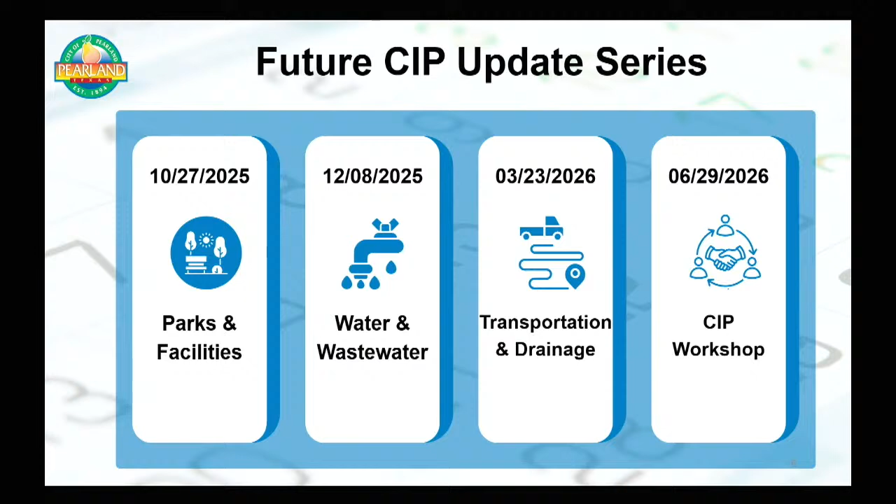At this time, I'll pass the presentation over to Ms. Erica Weekly for updates on the budget impacts. Good afternoon, Mayor and Council.

I'll review the key milestones and budgetary implications related to the fiscal year 26 Capital Improvement Plan. Earlier this year, on September 8th, City Council approved the fiscal year 26 Capital Improvement Plan. This approval outlines the planned infrastructure investments and major projects for the upcoming fiscal year.

Then on October 13th, Council approved the intent to reimburse for fiscal year 26. This step allows us to begin spending on approved projects up to the listed amounts, even before the actual debt is issued. It's important to note that while this authorization lets projects move forward, Council still needs to approve the awards for each individual project as they come up.

Looking ahead to May 2026, we expect to complete the fiscal year debt sale. The timing of this sale is significant because any debt issued in fiscal year 26 will affect the fiscal year 27 debt rate. Similarly, if we make changes to the fiscal year 27 Capital Improvement Plan, those adjustments will influence the fiscal year 28 debt rate.

Finally, it's important to remember that operations and maintenance costs are built into each CIP project. These costs are included in the budget during the year the project becomes operational. We also incorporate these ongoing expenses into our multi-year budget forecast and rate model to ensure long-term financial stability.

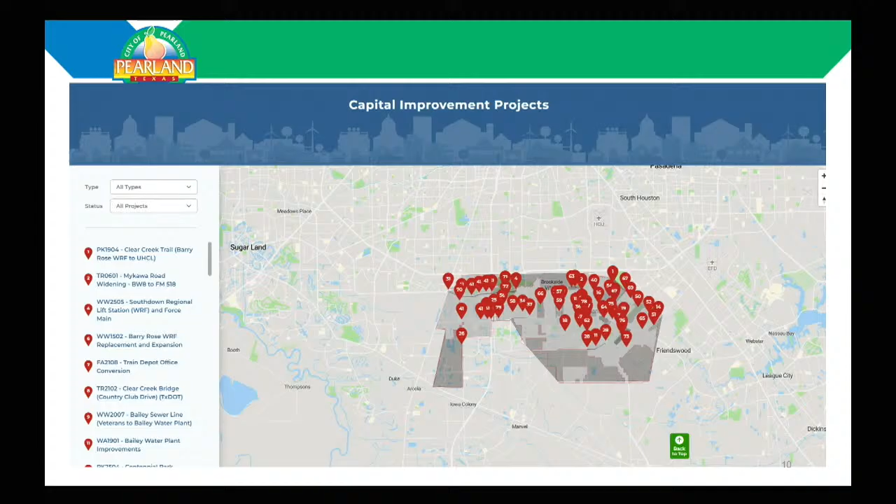We have a lot of projects to cover today, as I mentioned, and we will start on the water projects. On the next slides, we'll look at the water projects that have been completed, are under design or construction, the ones starting in fiscal year 26, as well as anticipated future projects.

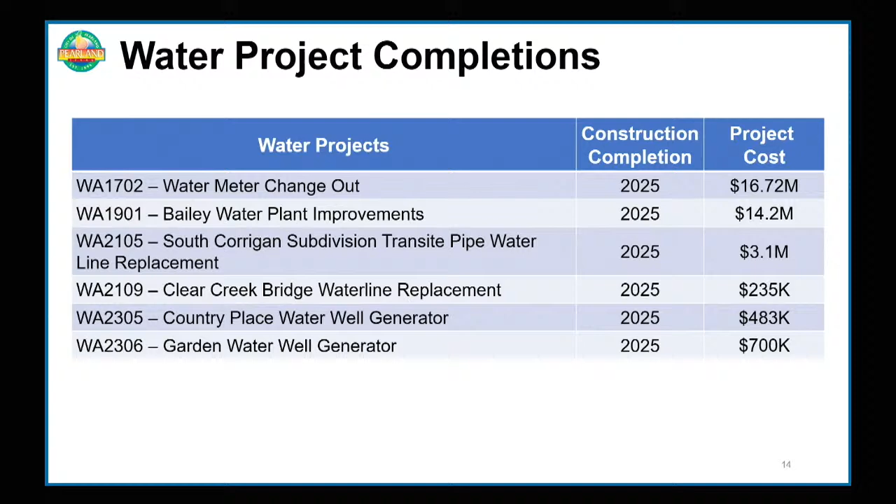Out of the completed projects, I would like to highlight the Bailey Water Plant improvements. This project aimed to address iron and manganese, which occur naturally in groundwater, but neither element causes health effects at concentrations found in Pearland. They sometimes have a rusty visual impact on water quality, so to efficiently remove the iron and manganese, the city installed aerator removal systems.

Although this project experienced some delayed challenges, we completed it approximately $268,000 under budget, and the facility has been providing quality water to the east side of Pearland. Since its commissioning in early 2025, the water quality throughout the Bailey Road and Veterans Drive corridor has vastly improved. This improvement has resulted in decreased water system maintenance to ensure optimal water quality.

The water lines replacement project at South Corrigan neighborhood replaced approximately 3.5 miles of transite water lines with PVC. Transite pipe water line has a failure rate significantly higher than PVC pipes and is also responsible for a higher percentage of work orders per foot and requires greater resources to maintain relative to PVC. This project experienced some delays but was still completed within budget.

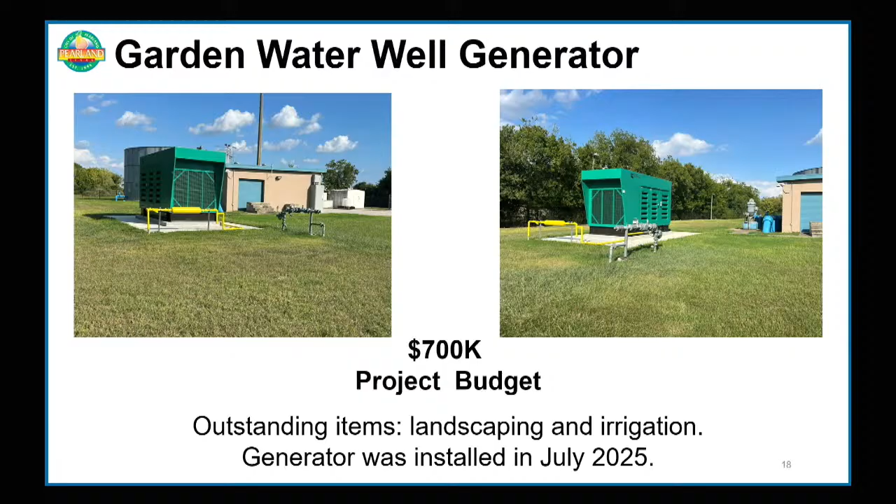Creekview and Shady Crest Transite Pipe Waterline Replacement has been combined with the drainage portion funded by the 2023 bond program, and the wastewater portion, which we will also mention later. The southwest quadrant of Old Town Transite Waterline Replacement also included the drainage portion funded by the 2023 GO bond.

Here are some of the projects I would like to highlight that are currently under design. The FM 518 utility relocations, Phase 1 together with Phase 2, are currently at 90% design phase, and once completed, construction will be handled by TxDOT. This portion, also known as the West Segment, has a construction plan date to start in the fall of 2028.

Southwest quadrant of Old Town Transite Waterline Replacement, as mentioned, also included a drainage portion. This specific project includes replacement of approximately 2 miles of water lines. The project has completed the design portion and will move to the bidding phase, with estimated start of construction in the second quarter of 2026.

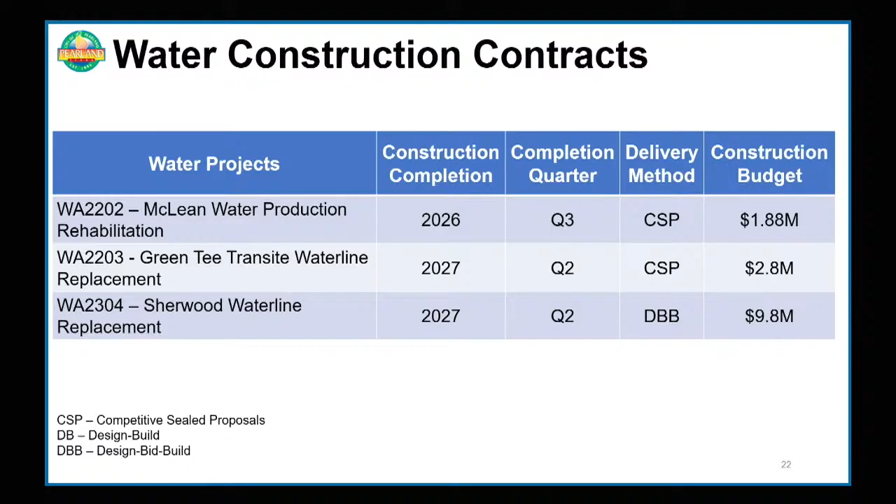McLean Water Production Facility is currently in construction and expected to be completed by fall of 2026. This project was enlisted due to numerous water line failures that the Public Works Department has experienced over the past several years. Most of the water line infrastructure at the production facilities is original to the facilities and has not been replaced since inception. The main goal of this project is the reduction of service interruptions.

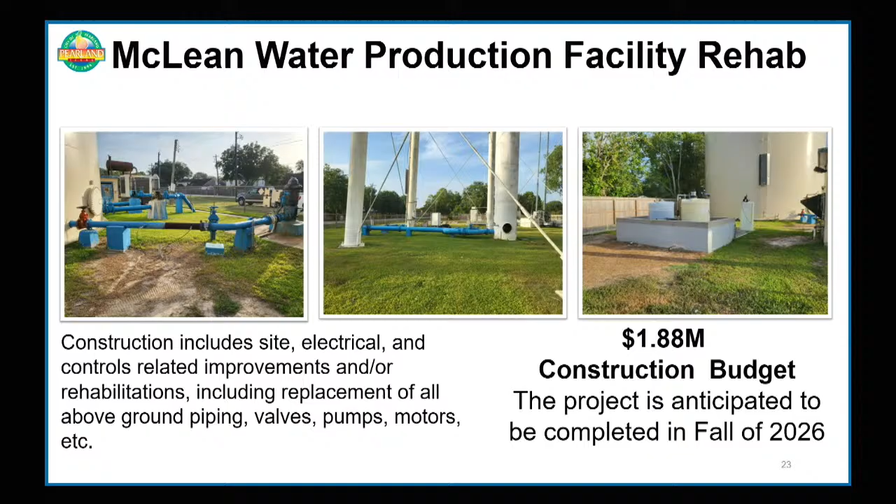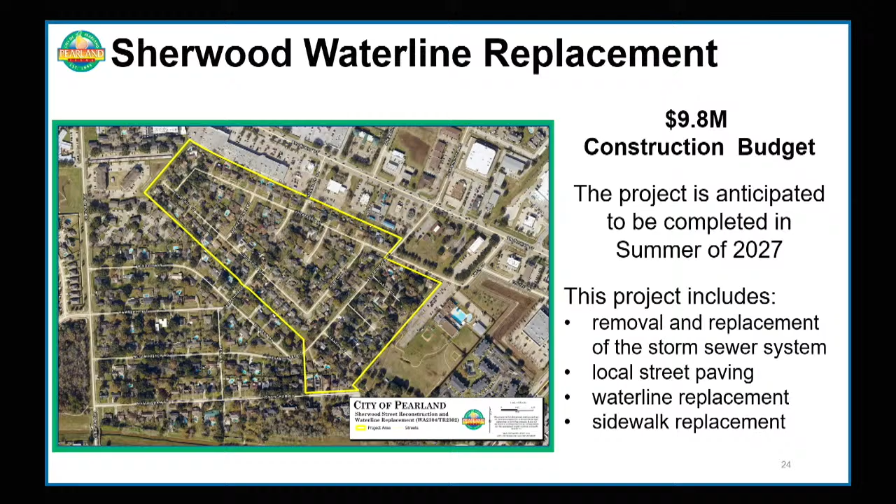The 2018 assessment report identified each plant site and ranked McLean as a priority to address internal lines, correct pump size for distribution, among other asset rehabilitation and replacement. This project was awarded by council in October and is expected to start construction either this month or January of next year, and expected to be completed by summer of 2027. The project includes drainage, water, streets, and sidewalk improvements.

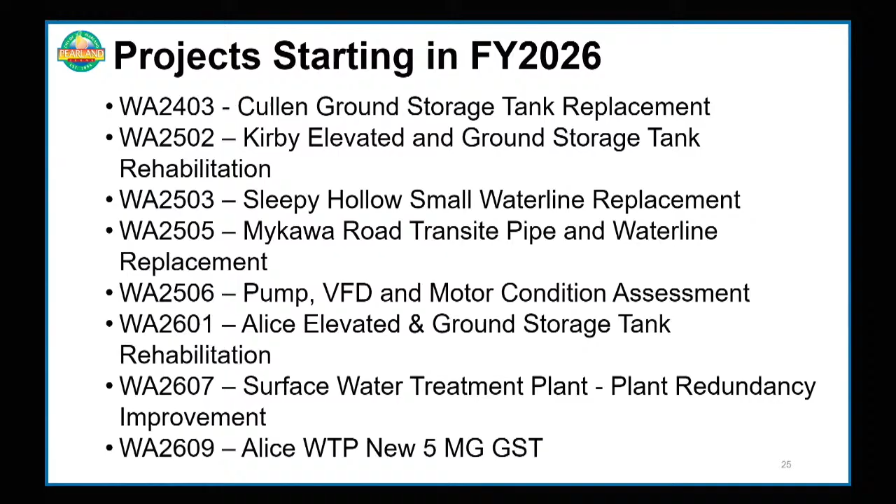The Alice Elevated and Ground Storage Tank Rehabilitation Project includes the assessment of the ground storage tank, which has a 5 million gallon storage capacity, and the elevated storage tank, which has a 500,000 gallon storage capacity. Both are being planned for rehabilitation after recommendations from the assessments.

Since there is another project planned in the same location, we decided to combine this project with the Alice Water Treatment Plant's new 5 million gallon ground storage tank. This decision will allow better resource allocation, coordination with Pearland Water, and savings to the city.

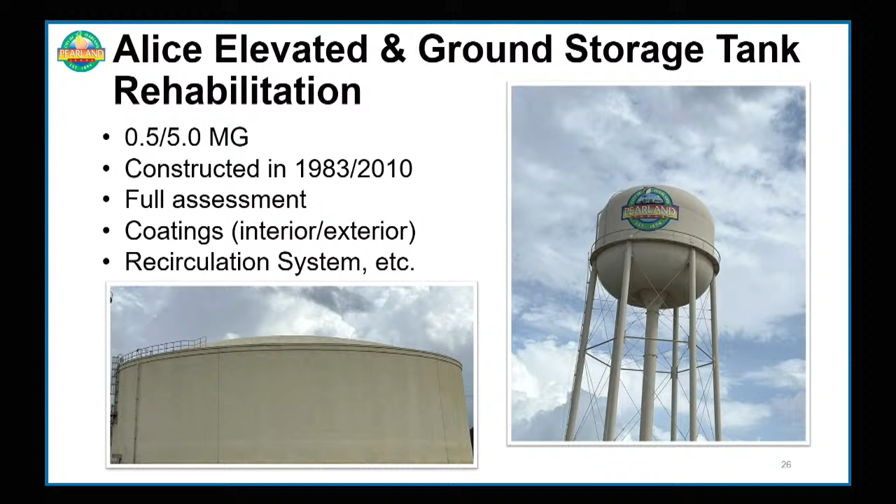These are the anticipated future projects, and they have not started design, study, or a schedule for future fiscal years. Here are the anticipated future water projects. They have not yet been funded, but are listed in the CIP for the purposes of financial planning, laying out what is needed, location, and timing for over the next 5 years.

Projects such as Lakes of Edgewater Estates Water Quality Program, Liberty Drive and John Lizer Transite Water Pipe Line Replacement, Towne Lakes Water Quality Program, and Alexander Landing line replacement have been recommended by the City's Water Master Plan due to failing transite water lines that are being replaced with PVC piping.

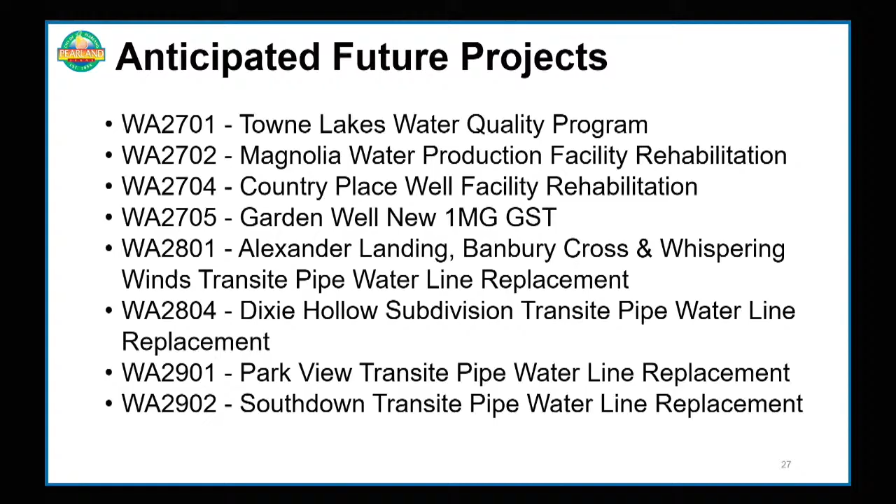And here are additional anticipated future projects.

Out of the future projects, I would like to highlight the Lakes of Edgewater Estates Water Quality Program. This project is part of the city's multi-year improvement program to improve water quality by replacing aging water lines, increasing pipe diameter, and connecting dead-end lines. This project is planned to start design in fiscal year 30.

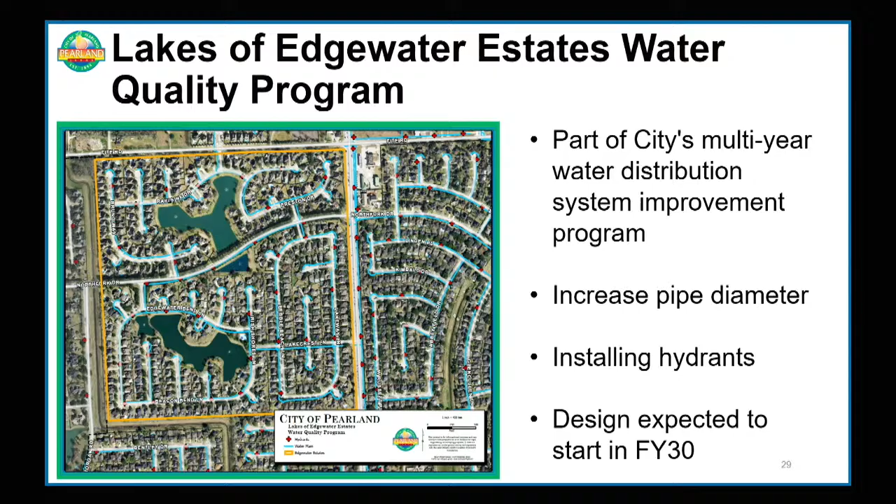This is another project that is being planned for the future, which is estimated to have design start in fiscal year 29, and it has not yet been funded.

The Liberty Drive John Lizer Transite Pipe Water Line Replacement is part of the city's commitment to replace existing transite pipe water lines. This project will replace approximately 1.5 miles of transite water line infrastructure in the John Lizer and Liberty Drive areas. The service lines will also be replaced.

Council, this concludes the CIP water updates. I will now turn the presentation to Mr. Julian Kelly, Assistant Director of Utilities.

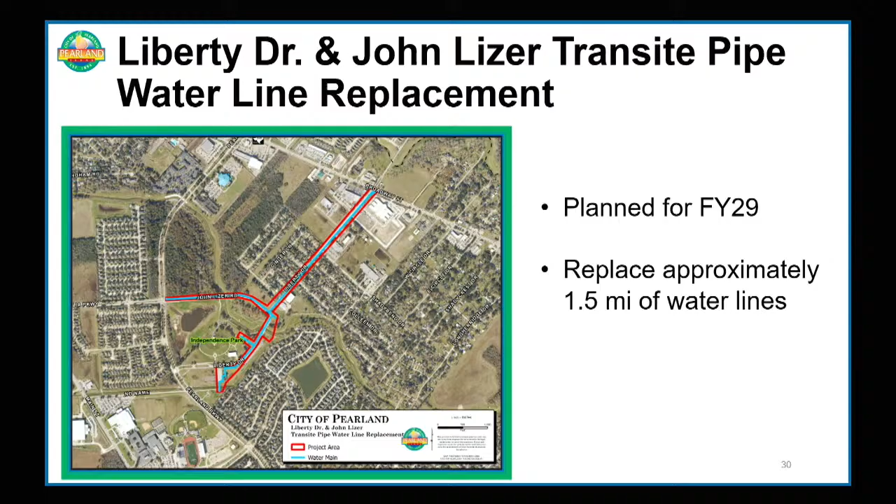Good evening, Mayor, council members, and listening audience. Thank you for this opportunity to speak with you this evening. As the Assistant Director of Utilities, it is my privilege to introduce to you the operations and maintenance update for our Pearland Water Division Department.

Tonight, you'll hear directly from our management team, who will provide you with an overview of the essential functions and how Pearland Water Systems operate safely and effectively. As a quick reminder, our division has many different supporting staff and divisions together, but we have 3 core divisions that are part of our department.

Water production, which ensures the safe and reliable drinking water supply that meets and exceeds regulatory standards set by the EPA and TCEQ. There's distribution and collections, which is responsible for delivering high quality water to our customers and efficiently managing the return of that wastewater to the treatment plants. And wastewater treatment, which handles the processing of domestic wastewater to protect our public health and ensure environmental safety and discharge.

These functions all wrapped together are fundamental to our community's daily life and are a key focus of our capital improvement plan. The updates you'll hear today reflect the dedication of our staff and those that help us on a daily basis. Thank you, and at this time, we'll turn it over to Nicholas, the Supervisor of Water Production.

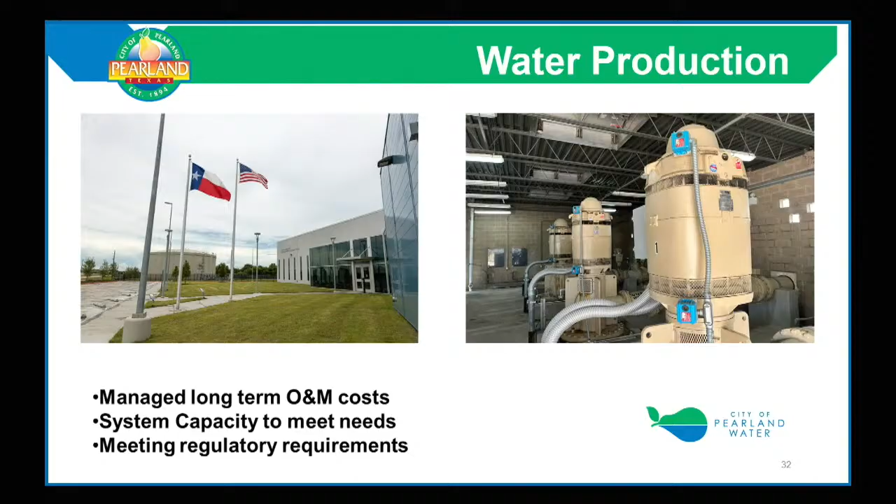Our team depends on a variety of critical assets to ensure production, treatment, storage, and distribution of safe drinking water to the city's water system. Pearland Water maintains these assets through annual operational budgets and strategic CIP projects.

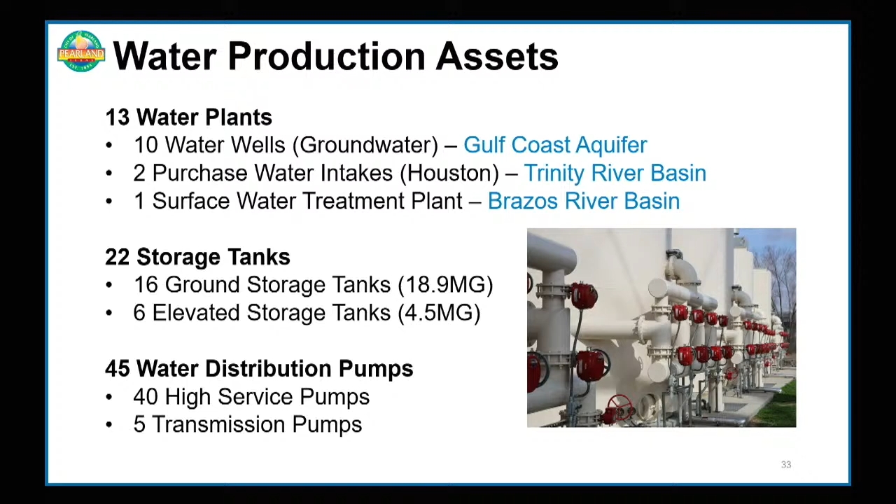Since the integration of the city's surface water treatment plant, Pearland Water is aiming to operationally reduce our annual budgetary requirements for our purchased water reliance. These sources will continue to be available when needed to meet our water system demands in higher volume conditions. Our team will elaborate further on this later in the presentation.

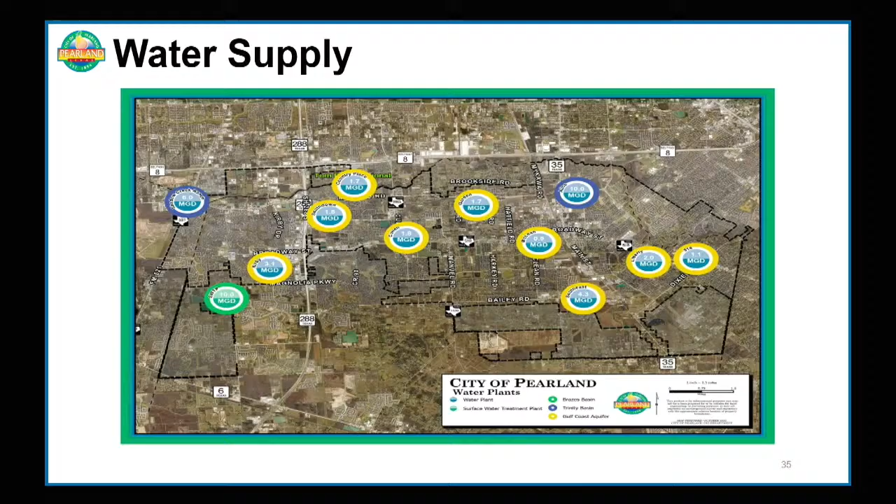The city's diverse water supply provides the necessary production capabilities to continuously meet the water system's demand through all seasons, presented along the Gulf Coast region. Our current water supply capacity is 40% from the Gulf Coast Aquifer, 37% from the Trinity River Basin, and 23% from the Brazos River Basin.

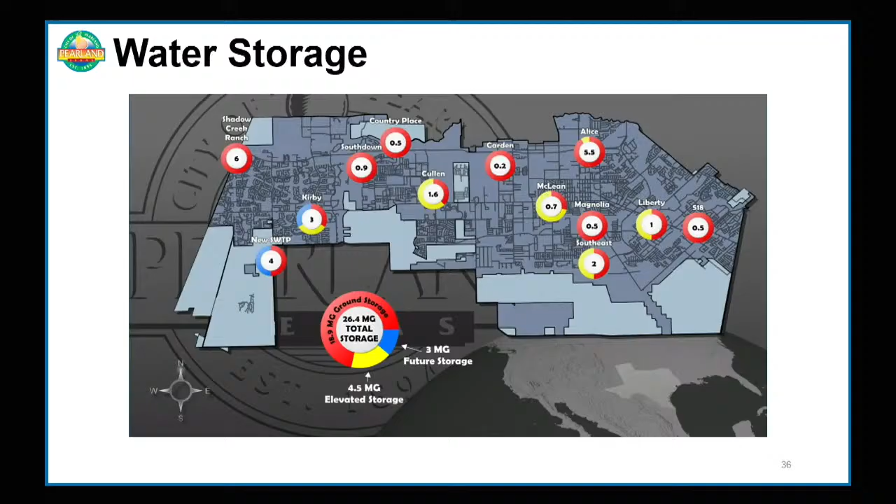With Pearland Water's combination of ground and elevated storage tanks, these storage tank supplies are replenished as the water system withdraws by consumption demand. Water storage tanks not only house the city's drinking water supply before being pumped for consumption, but they are also the most visible utility assets to the public.

Pearland Water's continued investments into providing safe drinking water to the city's customers requires a multitude of functions to ensure these critical services. The Pearland Water and Capital Projects teams are currently updating our water master plan that will provide operational and developmental practices to ensure our commitment to our community is continuously met. Now I'd like to introduce our surface water treatment plant manager, Sean Gilmore.

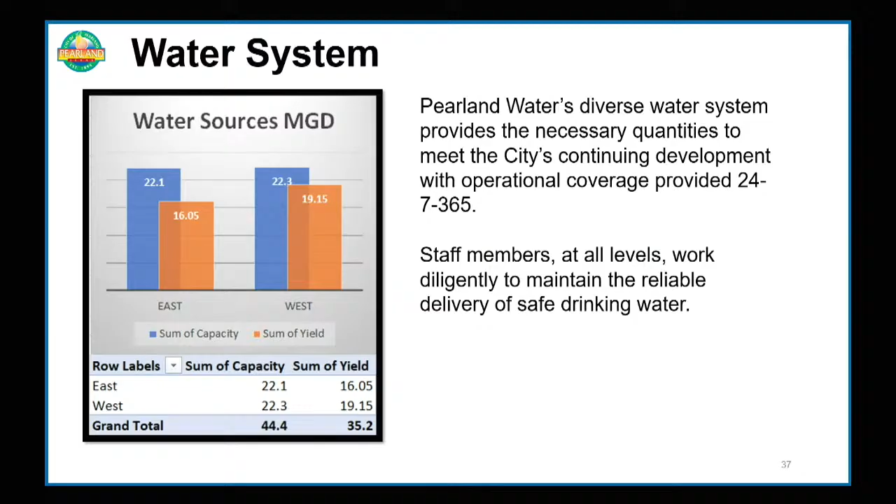Thank you, Nick. Thank you, Mayor and Council, for this opportunity to highlight the benefits of the largest water investment the city has completed to date.

After 1 year of operation, the surface water treatment plant has accounted for 62% of all water consumption west of Cullen, herein referred to as the West End. This has led to a 68% reduction in well water pumpage and a 23% reduction in purchased water usage for the West End, particularly through the Shadow Creek water plant.

While the average consumption for this area has increased 24%, the plant supplied an average of 5 million gallons per day over the year, with flows up to 8 million gallons per day during high peak.

Not only accounting for the majority of water in the West End, but production output from the surface water plant also makes the Brazos River Basin, although the smallest basin, the majority drinking water source within Pearland Water since January of 2025.

Even though the completion of the surface water treatment plant was delayed, population growth in Pearland was not. We are seeing the anticipated demands from the previous water master plan in population and need to take action to ensure our ability to consistently deliver high quality water as the population continues to grow.

The surface water redundancy improvement enables more effective treatment of water at higher flows than 6.5 million gallons per day, with the addition of a fourth membrane rack. The additional membrane rack will allow one rack to remain in standby or maintenance mode at all times. This strategy ensures smooth maintenance activity transitions between racks and stable plant flows for optimum treatment.

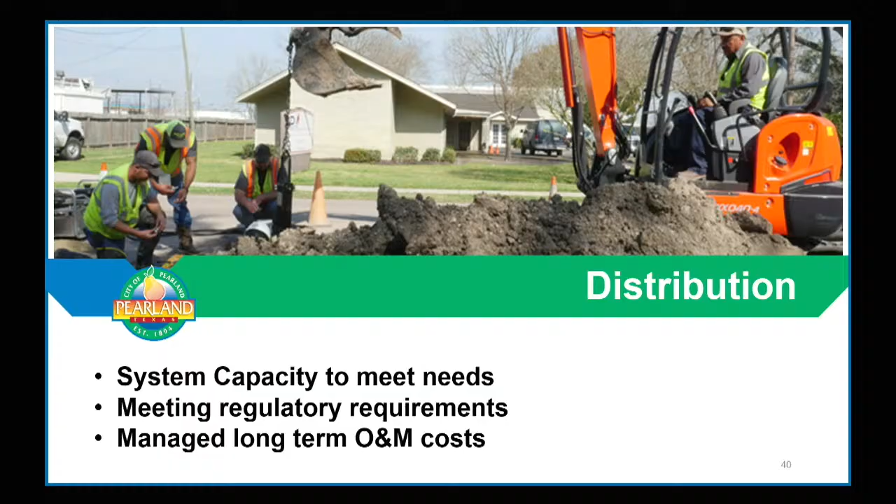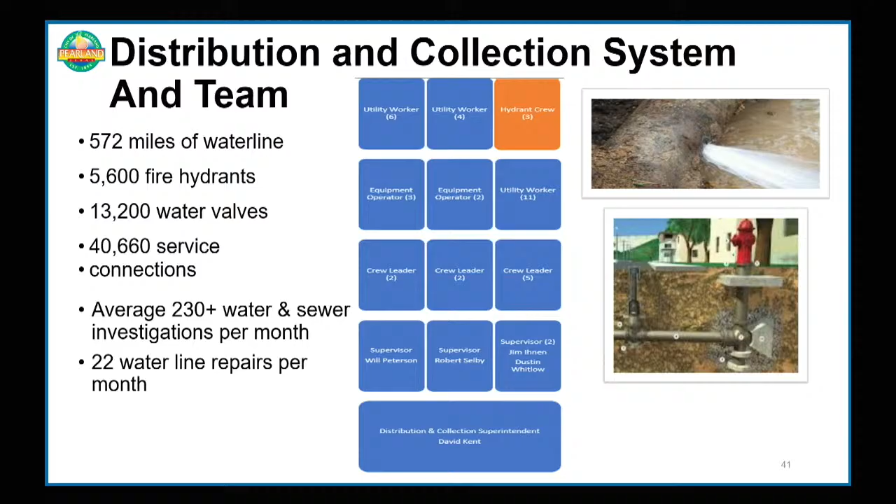Currently within the city, there's 572 miles of water main lines, 5,600 fire hydrants, 13,200 water valves, and 40,660 service connections. With the addition of the fire hydrant crew, the D&C team has increased up to 43 staff members. The team is tracking all inspections and repairs via city work orders, and the GIS data updates to make recommendations towards the CIP projects with valuable information.

This slide illustrates the age of waterline construction within the community and highlights the increased age of infrastructure near and east of Main Street. This image also does a good job illustrating the newer infrastructure from essentially Old Town West.

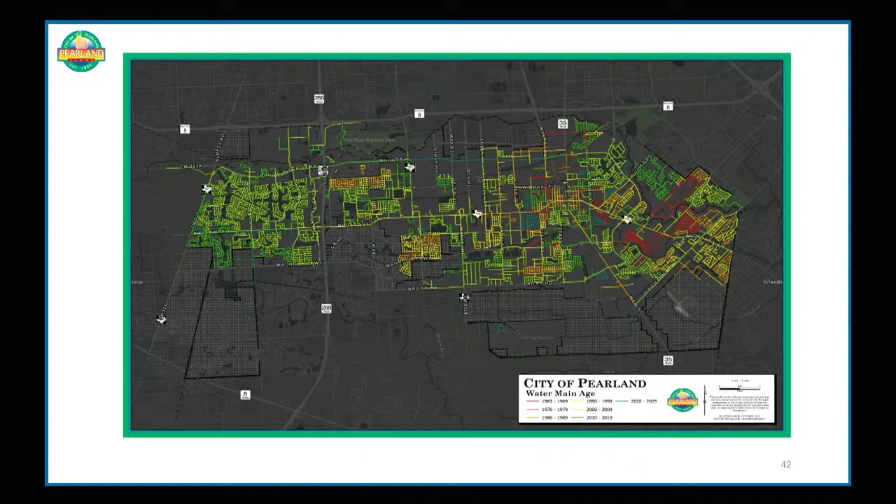The city has approximately 72 miles of transite water line remaining within the distribution networks. While a common construction product in its time, transite pipe has a life expectancy of 50 to 70 years and is extremely susceptible to failure and damages due to shifting soils and adjacent construction activities.

During the CIP projects, the water main lines are being upgraded to PVC piping and additional fire hydrants for fire protection and mainline valves to help minimize isolation within the water system. Thank you for your time, and at this time, I'd like to turn it over to Mr. Epperson.

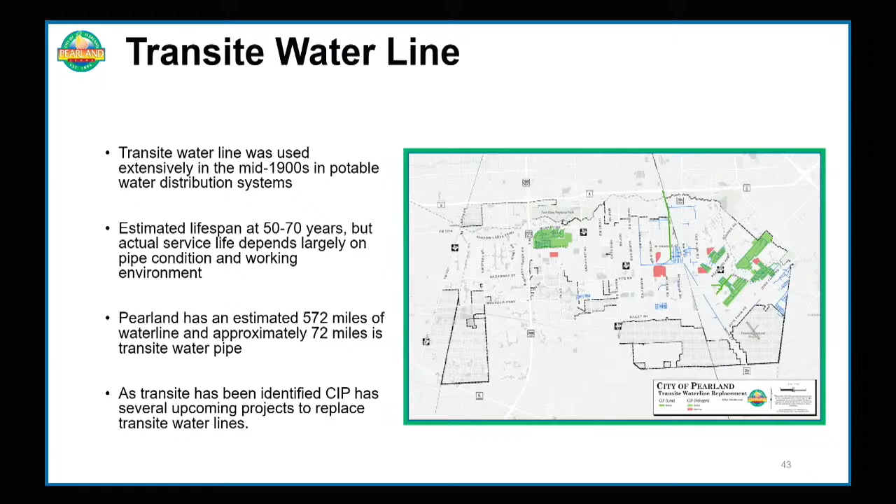So that concludes water, so we'll pause here and answer any questions or any comments council has, and then we can move to wastewater. I'm just, I'll start off with a couple.

On the redundancy piece, was this something that we didn't anticipate when we built the plant, or did we understand it and maybe midstream and decided to wait till later?

I think the plant was designed to be a first phase 10 MGD, which running at full capacity with all the racks in there, you can, but to have that redundancy, if you take a rack down to be able to run at that, that was something that was identified as we worked through the project. And so the plant was planned to be expanded, so it's really just bringing in those additional racks.

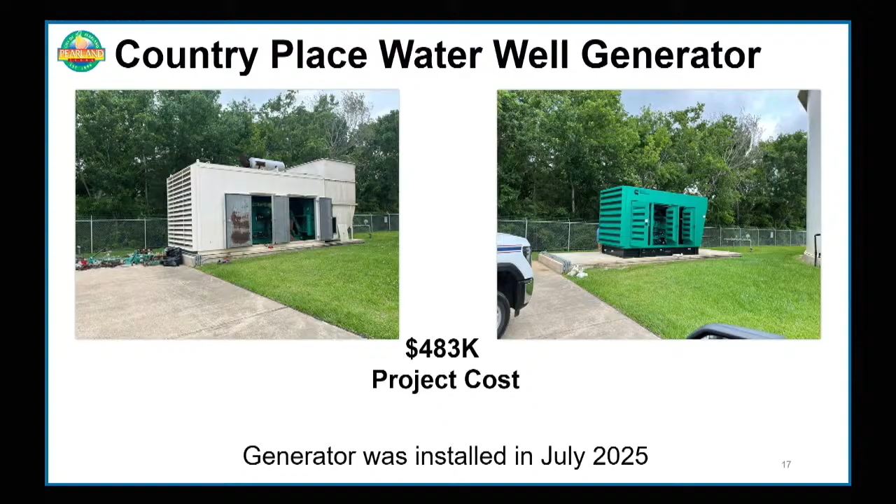So I think maybe we need to define what that overage really was. It wasn't that we awarded a construction contract and went over that. My understanding is it was maybe from the original budget that was put together.

No, these projects did not finish over budget. They finished within their budget, including the allocated grant funds. So I think that refers back to the original budget numbers that were put together, and as we became aware of what those numbers were going to be as we worked through the project and bid them out, they didn't actually go over what we'd allocated.

Okay, I think you answered the other items I had written down, so I'll turn it over to council for questions and comments. Ms. Kate?

Is the transite water pipe dangerous? Old and brittle—if it's old and brittle, is it? No, not that it's dangerous, it's old and brittle. It's not dangerous, but it's where most of our water main breaks occur, which causes us to respond during the day, over the nights, over the weekends.

I think the other thing is some of those areas, as mentioned, don't have the size of water lines that we minimally require now to have full fire flows, so we're able to go in and add the additional fire protection when we redo those neighborhoods.

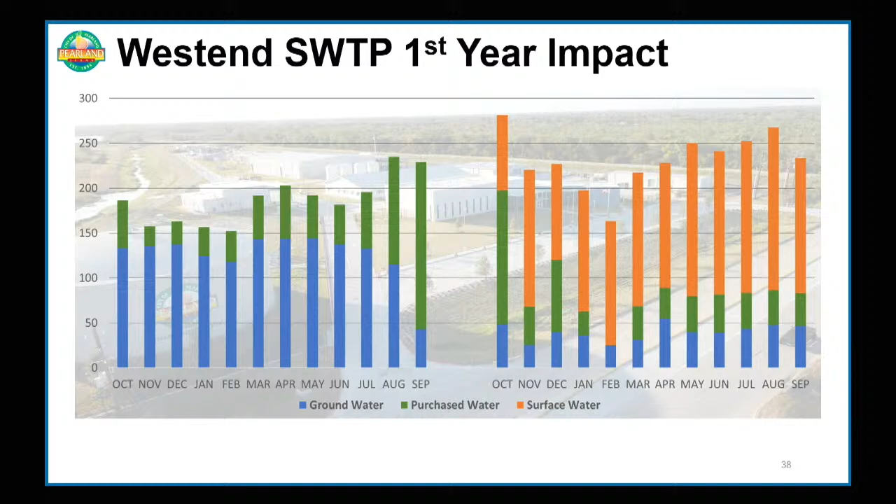So the y-axis is going to be millions per month. So the first one in October of '24 is about 180 million gallons a month. Okay, so it's millions, is what you're saying.

Correct. All right, so when we look at '25, our groundwater production is considerably—I'd say maybe 30% of what it used to be. That'd be a rough guesstimate just looking at it. Correct, the reduction in groundwater was 68% on the west end. Okay, all right, so not too far off.

And just to clarify, this depicts the west end, which I believe is west of 288 or west of Cullen. West of Cullen. Okay, all right, I was just curious looking at what was coming out of the ground versus what we've got coming from the surface. All right, thank you. Any other questions, comments? Mr. Carbone? Thank you, Mayor.

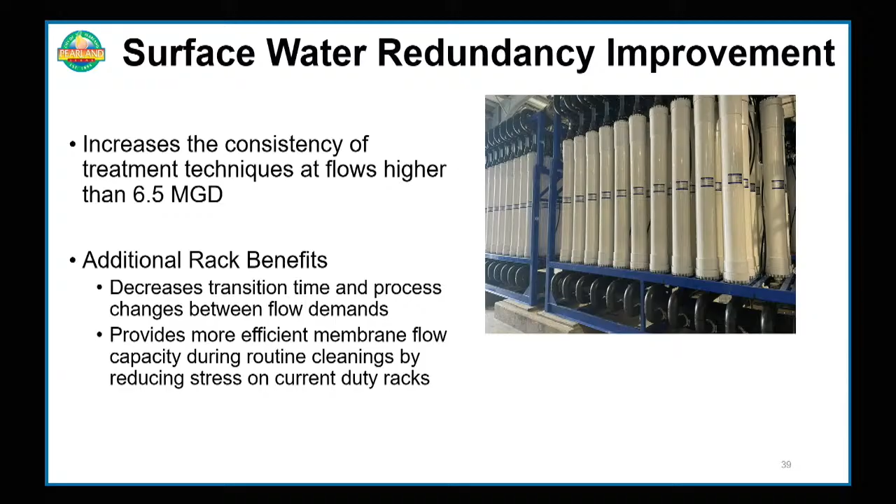On that WA 2607, the redundancy piece, when you look at the flows coming out of the surface water treatment plant, on average we're not hitting 6.5 yet. So the question is more on timing. When you look at the rate model and the increase in rate coming next year, is this a must-have or a nice-to-have? And what would it look like if we push this out a year or two to give us some relief on the rate?

So there's about 625,000, give or take, for every 1% on the rate. So if you move this out into the future, that would have maybe a 2 to 4% impact on the rate, roughly. So what years is this scheduled for? So we know what years that will potentially help out. I believe design is in '26 and then construction potentially the following year.

Okay, so is this impacting the 9.5% that's in the following year? I know we've got that one. So this is potentially one we can look at. Every year as we get into the budget, we start looking at what projects are absolutes and which ones are things we can potentially push to make sure we're managing that rate as well as possible. So I think this is one we would take a look at seriously.

Yeah, I think looking at the flows—I don't remember what slide that was—but overall it doesn't look like we're getting anywhere close to that 6.5 million. So if we've got some time, I think it might make sense to look further at pushing it out. And I think this summer will really help us take a look at that.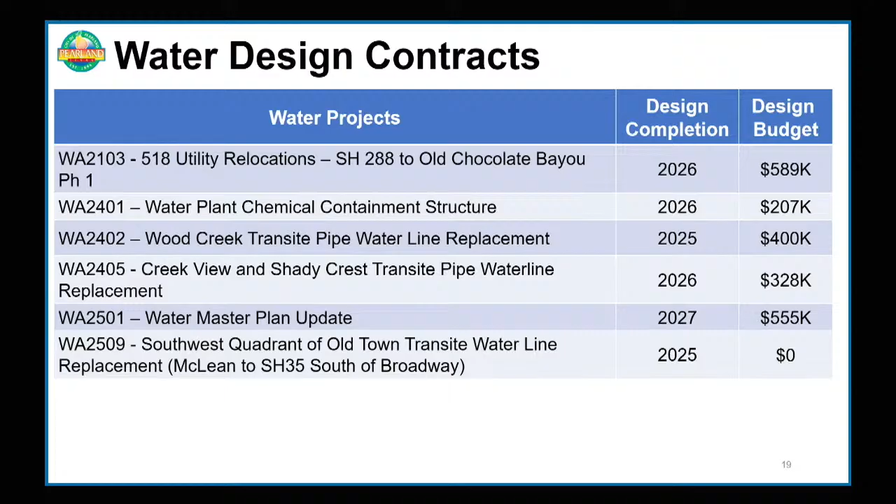Not necessarily right now, if you could just send that out so we have an idea of how quickly those are going to move from design into construction. Yes, I can do that. Okay, thank you very much.

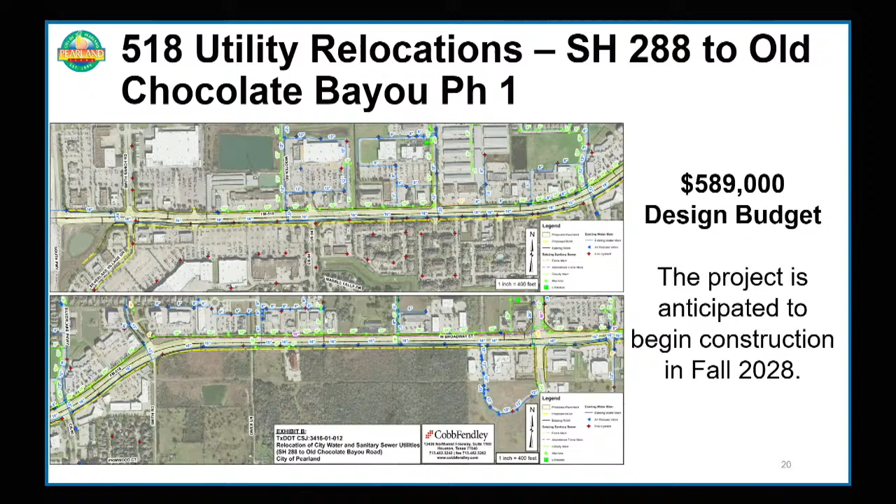And I want to make sure I understood that question. So you're on this slide wanting to know when we move from completing design into construction? I'll give you an example. So if you go to the next slide, here it says that phase one is going to begin construction fall of 28. The next slide goes to the southwest quadrant, says construction expected Q2 of 26.

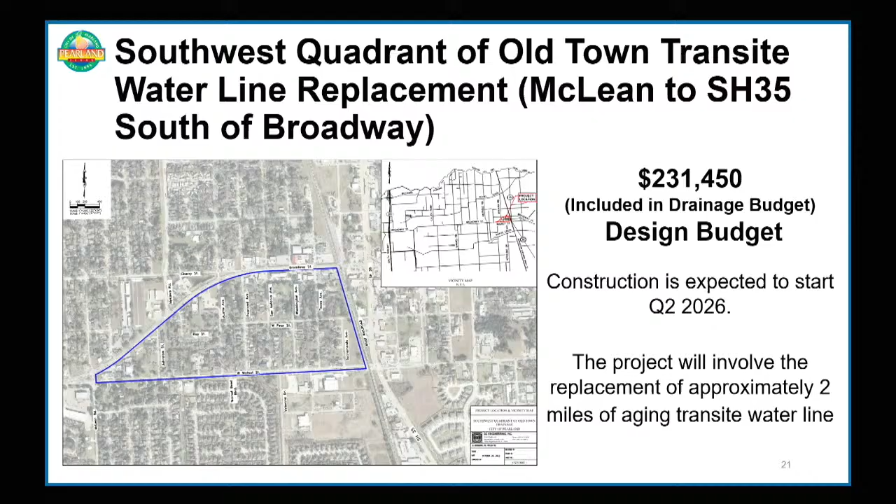Okay, I'm just looking for the same information for the other projects listed that are completing design. There was 2 or 3 other projects on there. Yeah, I mean, we can assume that when we complete design, we're moving towards bidding and construction. So construction is typically going to run about 3 months for the bidding process and the award process, and then construction would start. But we can add that in the future as well. And the difference on the 518 is TxDOT's doing the construction. Okay. Right. So that's all I was looking for there.

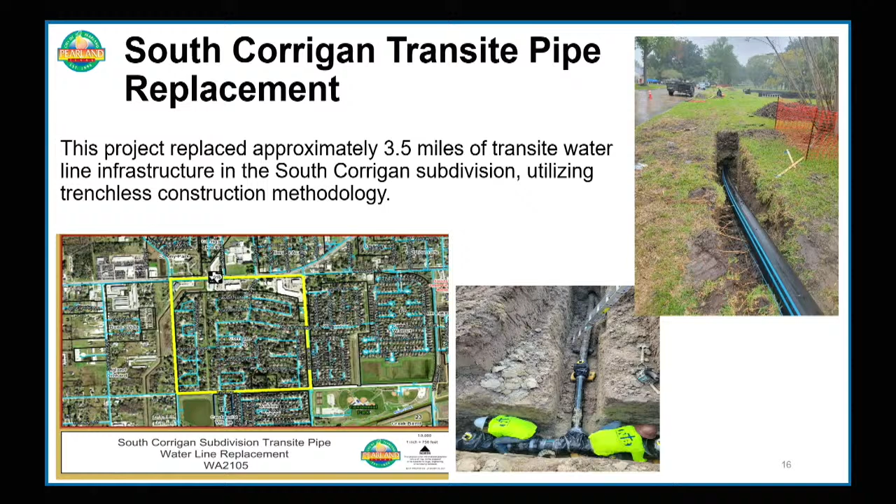And then on the last thing, I know we talked a little bit about this on the water quality side of things, slide 16. We focused a little bit on some projects not necessarily going as well as we had hoped financially, but I want to make sure we also - I'm sorry, back one more, slide 15. Also right there, 2025, that was a big project, and kudos to you guys for getting it done, dealing with the hurdles, and still bringing it in under budget. We tend to harp on when things go over budget, but we also need to celebrate when things happen well and come in under budget. So thank you guys for the hard work that you did on that.

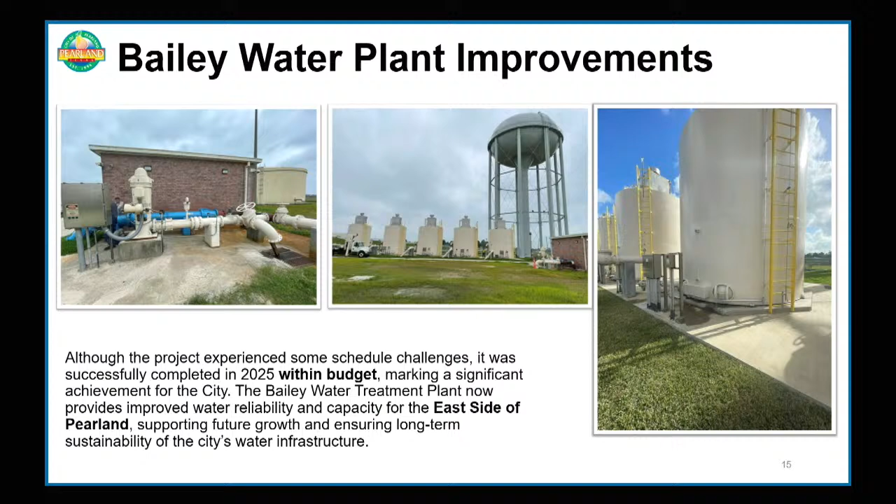Appreciate it. Mr. Fernandez? Thank you, Mayor. Just one more question regarding the surface water redundancy improvement project. What was the estimated cost on that? 3.95 million.

Okay, thank you. Any other questions, comments? Hang on a second. Mr. Patel, go ahead. Thank you, Mayor.

Hey, Trent, on slide number 34, and please forgive me, I can't remember, but when we're buying water, we're buying it from Houston, and my understanding was the production cost was a lot lower to purchase that water than the one we're, I guess, making out there on the west side. Is that correct?

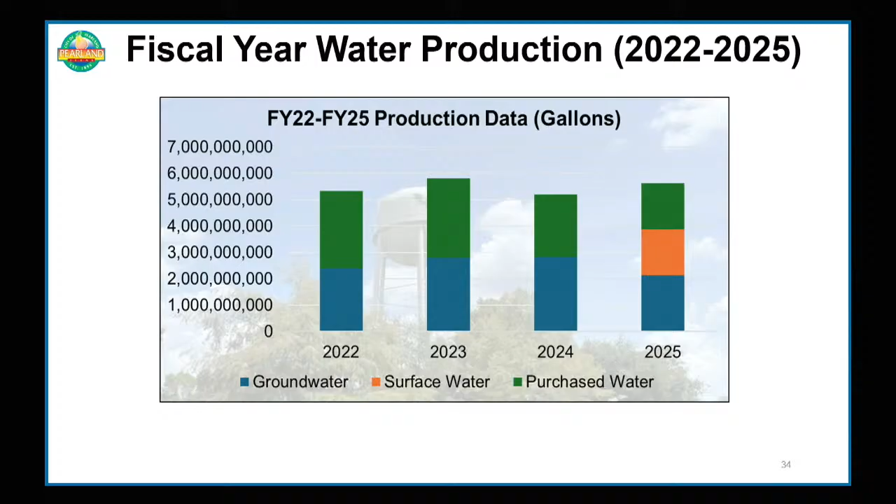So I think when we look at the purchase water, there's 2 different agreements we have, and one of them is the purchase of the 10 million gallons per day out of Houston Southeast plant. We're a co-participant through GCWA, so we actually paid the capital cost for that plant expansion. So that purchased water is very cost effective. It's actually less than what we are able to produce at our surface water plant. Where we've reduced that purchase water amount is the take point out on 521, the Shadow Creek Ranch take point.

That's where we pay a much higher rate to the City of Houston, because we were not a capital investor in that plant. That's what we saw reduced significantly on the other slide. Our current contract with Houston has a minimum take or pay amount, and we've been able to run that down and take just the minimal amount we'd pay whether we took it or not, keeping it from going above that threshold where we'd start paying a premium rate.

So with the new surface water plant, we've been able to reduce that FM 521 purchased water. But we'll always rely upon, and it's very cost effective for us to rely upon, the Alice Street water connection to the Houston Southeast plant.

So for me, if you guys can in the future give us a breakdown of the cost coming through, running at the 10 million or 6.5 million gallons from the plant we're running, compared to the 6 million we're getting from Houston on the 521 section. I want to see whether we have extra capacity. I know in the past we talked about selling some of our water if we expand. I heard we could go up to 20 million gallons on the new plant. How much growth is left on the west side of town, and how much land is left, so we can consider selling some of this water to compensate our taxpayers and bring our costs down.

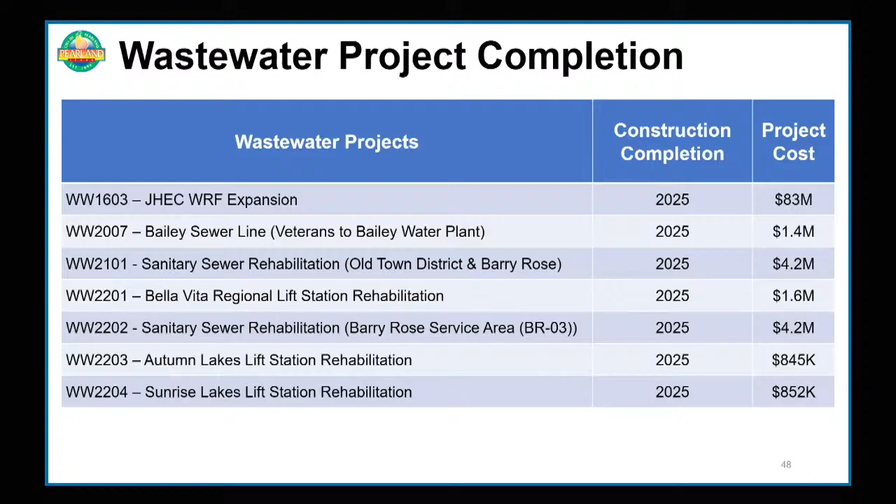Council, you remember our recent walkthrough to the JHEC facility. This project expanded the existing facility from 4 million gallons per day of treatment capacity to 6 million gallons per day. Although the project experienced some challenges because rehabilitation and replacement work was being done while the existing plant had to remain in operation, it stayed under budget and will be completed by the end of this year, with minor items to be addressed.

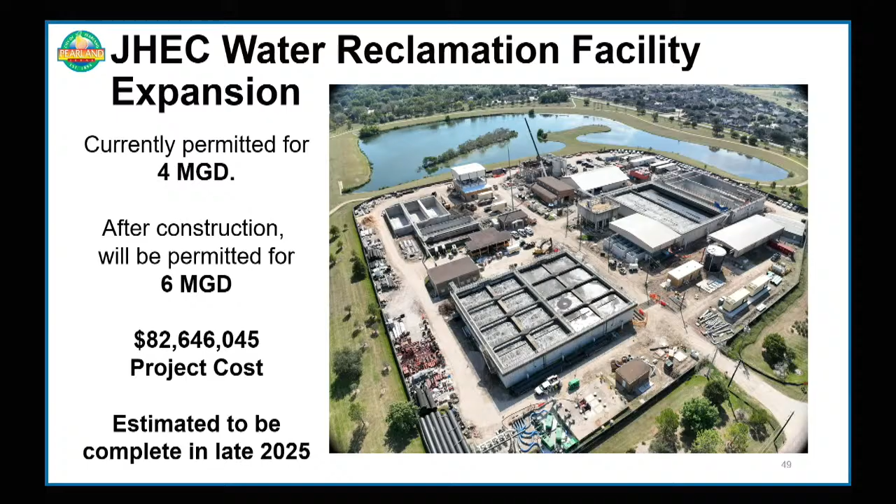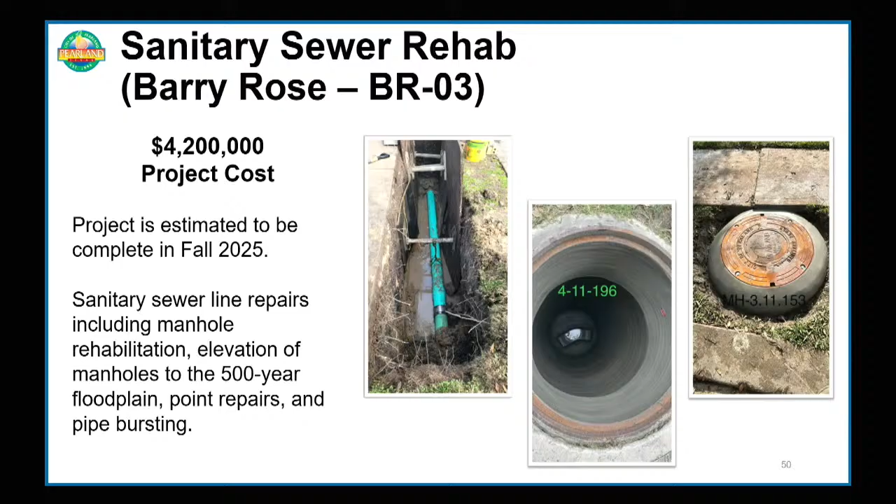The sanitary sewer rehab project within Barry Rose Basins was identified from the city's wastewater master plan, which showed high infiltration and inflow through flow monitoring. This project is estimated to be completed by the end of this year.

As mentioned in the previous slide, we completed 3 lift station projects in 2025. Autumn Lakes was one of these projects and received full rehabilitation of its assets. This project was completed successfully and approximately $730,000 under budget.

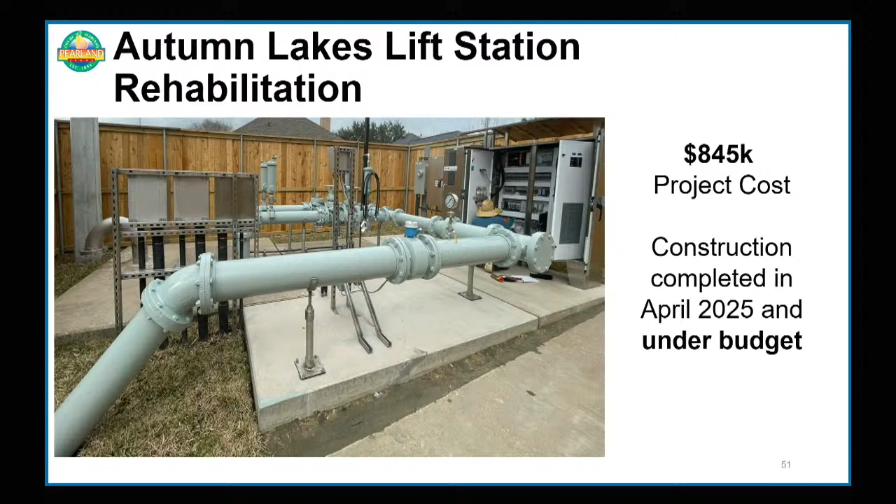Here's the list of the projects currently in design. The FM 518 utility relocations, as presented earlier, also has a water portion and has been combined with phase 2 of this project, representing the east segment. The utility relocation, except for the lift station relocation, will be constructed together with the transportation project by TxDOT's contractor as part of the advance funding agreement between the City and TxDOT. The utility relocation phases 1 and 2 will be funded partially by PEDC, the City, and TxDOT.

As you can see, we have multiple lift station projects, which we have combined for better resource allocation. The sanitary sewer rehab within Longwood basins has also been combined for better resource allocation.

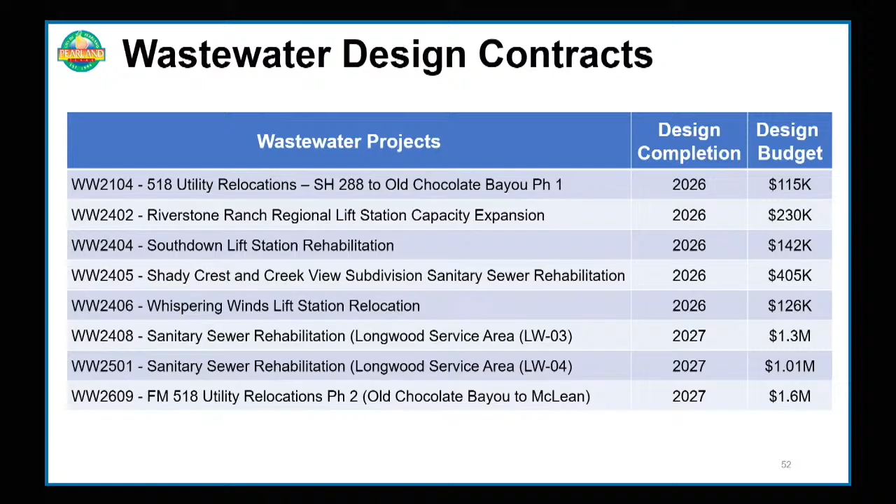We have several wastewater projects in construction ranging from $203,000 to $191 million. The highest budget expense is the Barry Rose Water Reclamation Facility expansion and Longwood Water Reclamation Facility decommissioning projects, which you will see on the next slides.

In addition to those significant projects, we are rehabilitating multiple lift stations throughout the city, as you can see on the next slide. Mykawa Road sewer relocation recently had construction completed, ahead of schedule and under budget.

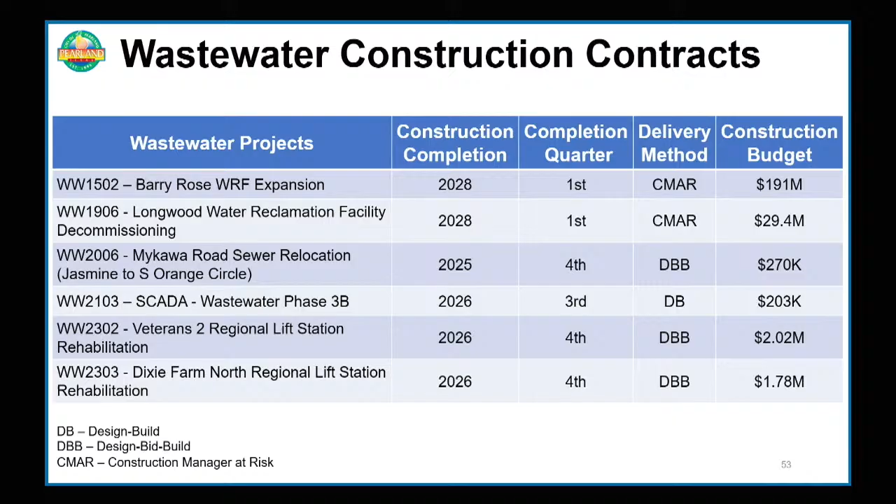Here are additional projects that are currently in construction.

Barry Rose Water Reclamation Facility expansion and decommissioning, combined with the Longwood Water Reclamation Facility decommissioning, make up the largest project the city has undertaken. The project includes expansion of the existing Barry Rose plant from 3.1 MGD to a permitted treatment capacity of 5 million gallons per day. This will allow the decommissioning of the Longwood Water Reclamation Facility. The influent currently going to Longwood will then be diverted to Barry Rose through the Longwood lift station and force main, which will also be constructed as part of this project.

The photo on this slide shows site construction from November. As you know, we broke ground on Barry Rose in July of 2024 and construction is ongoing. The City is utilizing the construction manager at risk delivery method. The CMAR advertised work packages as they were ready, which allowed procurement of long lead items and certain construction to start first while other packages were under design.

City Council already authorized the approval of the 3 packages named GMP 1, 2, and 3, with GMP 3 authorized last by City Council in November of this year, concluding the design phase of these projects. Work associated with GMP 1 and 2 has started, and work associated with GMP 3 will start early in 2026. Construction on this project is expected to be completed by the second quarter of 2028. Currently, the project remains under budget and on schedule.

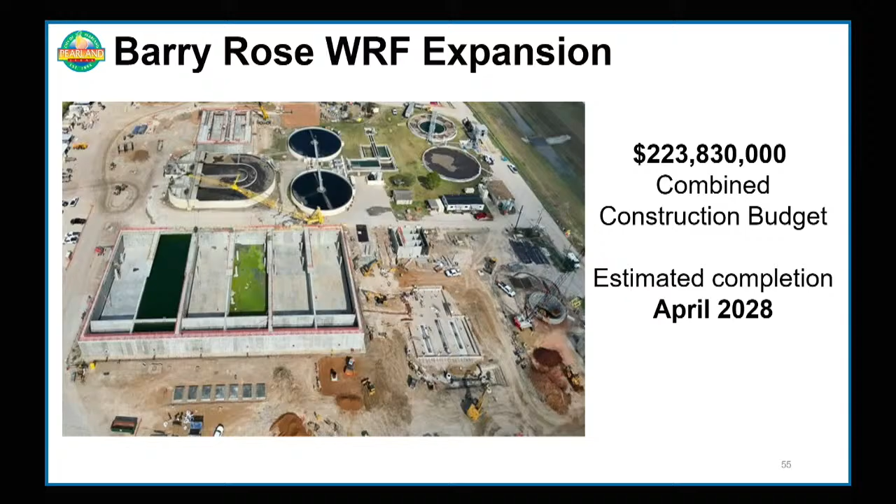Council, these pictures are from a visit to the Barry Rose Water Reclamation Facility construction site. We invited other department divisions that otherwise would not have a chance to visit a construction site of this magnitude. The photo on the left shows courageous staff from engineering, capital projects, and BMO who followed us climbing the sequencing batch reactors, or SBRs. On the right, we're looking at the construction of the influent lift station.

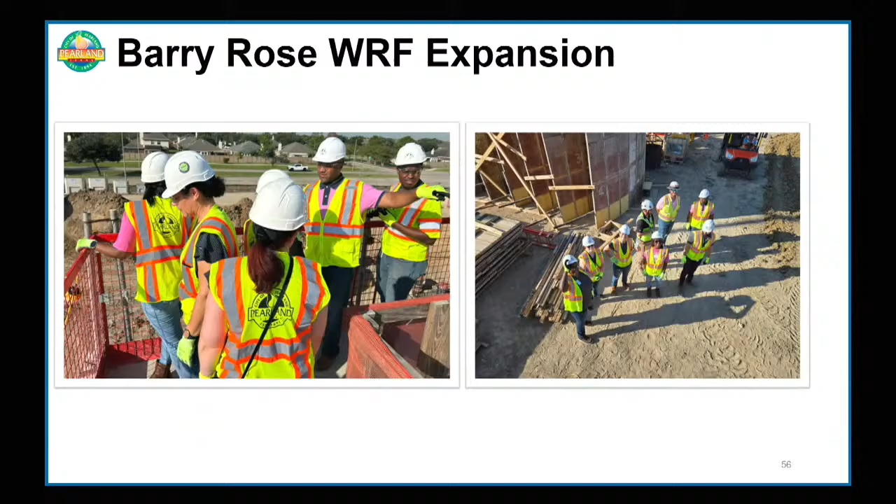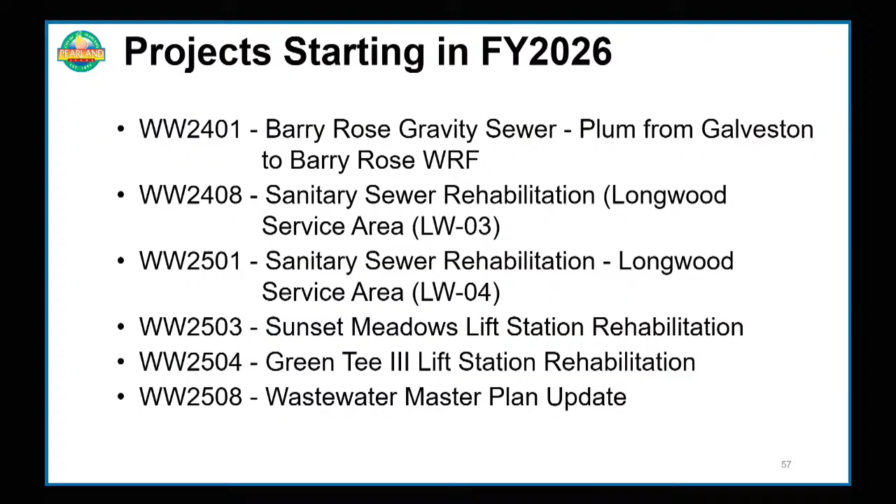In the CIP plan, there are also multiple lift station rehab projects that include rehabilitation and replacement of various assets. Here are additional projects included in fiscal year 26, including an asset management plan for the existing wastewater reclamation facilities.

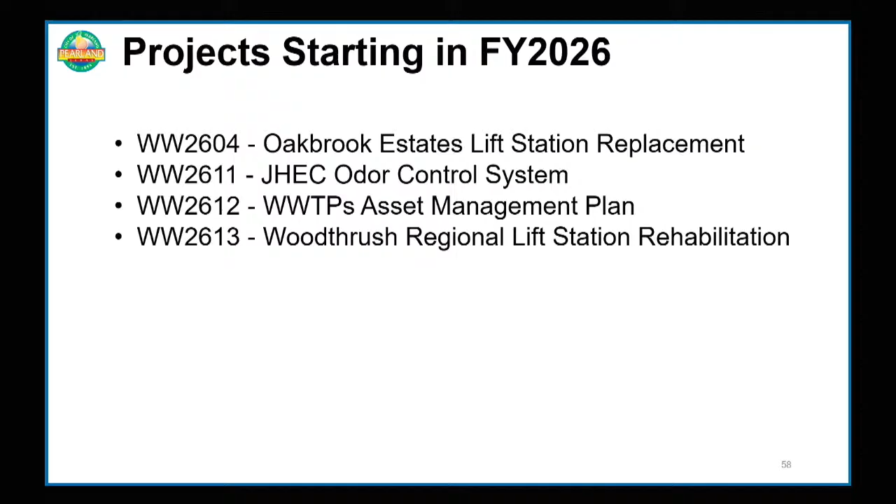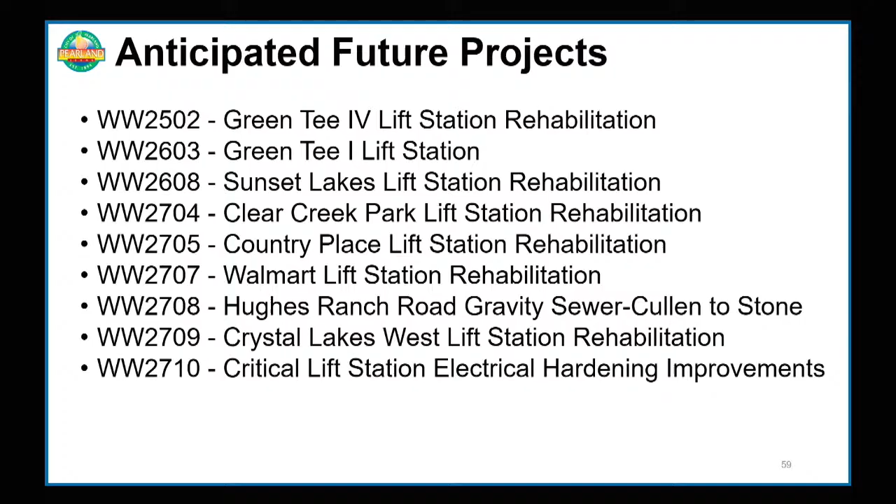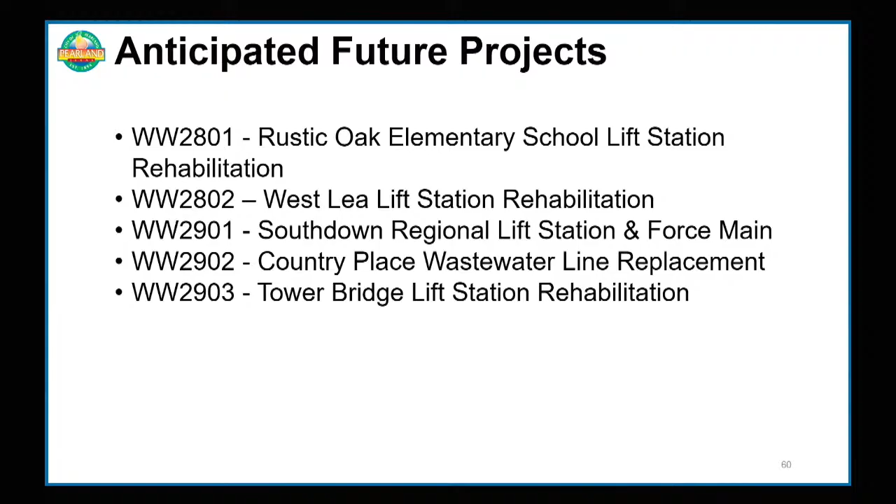Here are additional future projects. And Council, this concludes the CIP wastewater updates. I will now turn the presentation to Mr. David Kent, City's Distribution and Collection System Superintendent.

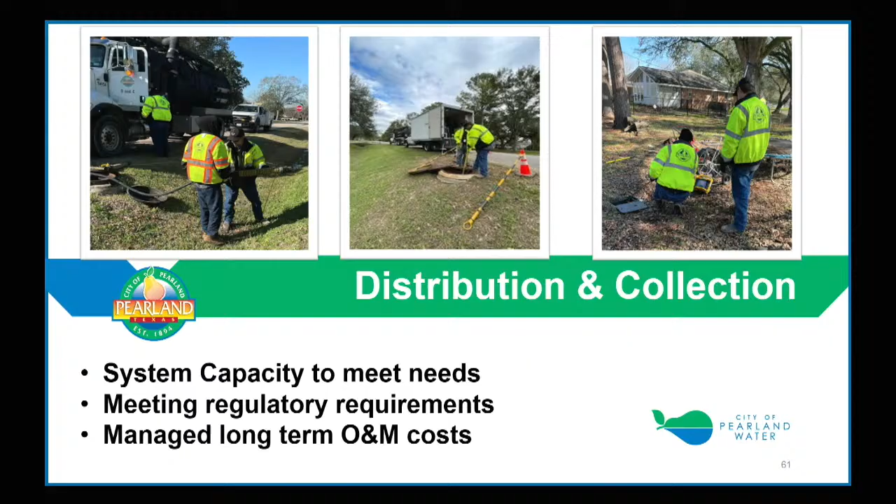Thank you, Fabiola. Now I'd like to share some highlights related to the collection side of the distribution collections team. The team is comprised of several services ranging from cleaning and televising of the sanitary sewer lines to manhole inspections for deteriorations and sinkhole investigations.

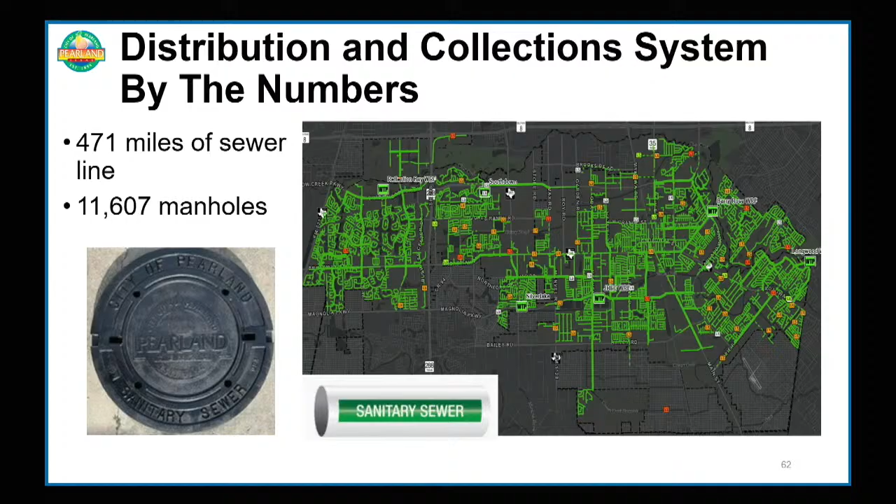Within the city, there are 471 miles of sanitary sewer lines and 11,607 sanitary sewer manholes, which provide opportunities for inflow and infiltration into our system for treatment. In major rain events, this I&I often leads to surcharged systems, backups, increased treatment, and sanitary sewer overflows.

Within the Barry Rose and Longwood basins, a robust program for I&I has been kicked off, including studies of the system and flow monitoring, smoke testing, as well as televising the lines to identify deficiencies within the system. Inflow is defined as surface water that enters the wastewater system from open cleanouts, yard drains, cross connections with storm sewers, and through holes in manhole covers. Infiltration, on the other hand, is excess water that seeps, trickles, or flows into old or damaged sanitary sewer systems from the surrounding soils.

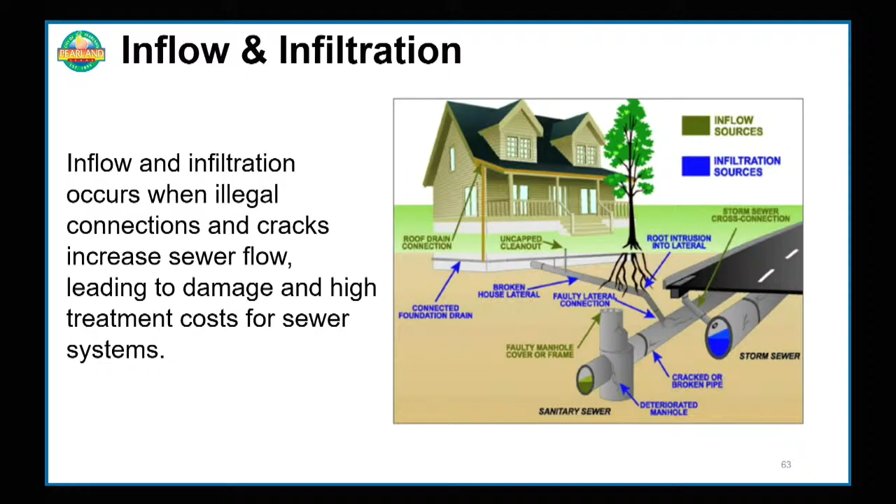In closing, several areas of consideration to improve on or expand our services as we advance through the next years include continuing to leverage the CIP process to reduce inflow and infiltration, furthering a manhole rehabilitation program, and leveraging contractual repair services such as pipe bursting and manhole rehab. With that, thank you again for your time.

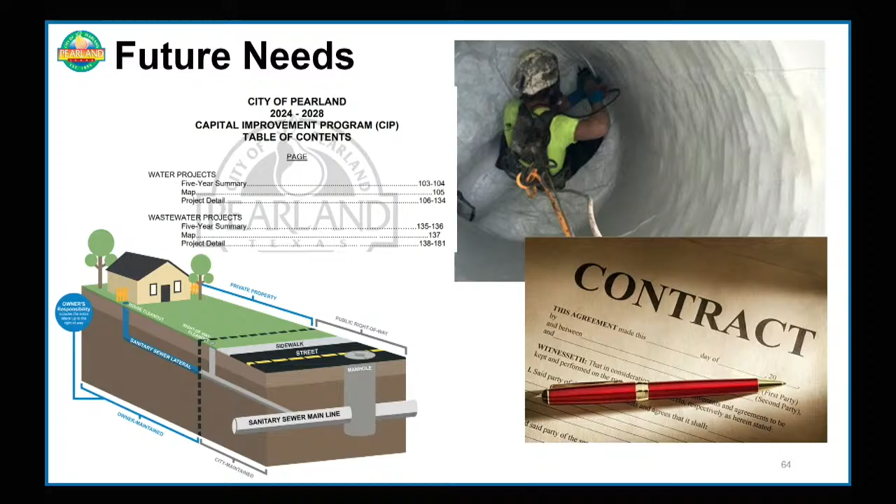I'd like to turn it over to the Wastewater Division, Mr. Jay Jones. Thank you, Kent. Good evening, Mayor and Council. Our wastewater division is made up of 13 highly dedicated professionals who take pride in providing safe, efficient treatment for the city. Tonight we'll touch on our system capacity, provide a map overview, and highlight how recent zone reductions are helping improve reliability and service delivery.

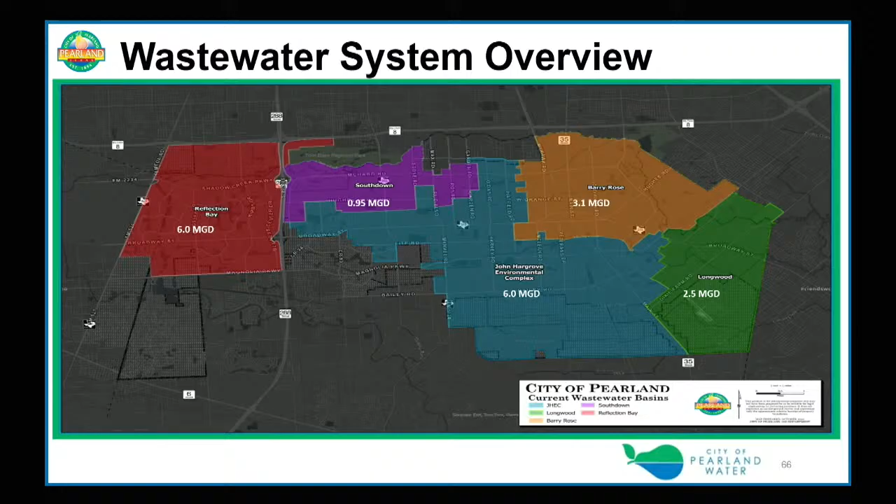Through recent capital improvement projects, we've been working to streamline the system by reducing the number of zones and improving flow paths. On the next slide, we'll show you what those changes look like and how they're improving the overall efficiency and reliability of our wastewater operations.

We have now streamlined our wastewater system into 4 main zones. This reduces the complexity, improves the flow efficiency, and lowers the maintenance needs. Fewer zones mean better use of our plants and lift stations and more reliable service for our community. This change helps us manage growth to keep the system running smoothly now and in the future. Thank you for your support as we continue improving Pearland's wastewater operations.

I'll now like to turn it over to Carlos, our manager. Thank you, Mayor and Council, for this opportunity to speak to you today regarding the newly established Asset Reliability Division and the role it'll play in the future CIP endeavors.

The asset management team will consist of the Asset Reliability Manager, Maintenance Coordinator, 4 plant mechanics, an Instrument and Controls Coordinator, and 2 Instrument and Controls Specialists. The lift station team will also fall under the umbrella of the team, which will consist of the lift station's maintenance supervisor and 6 utility maintenance technicians.

An asset reliability team turns infrastructure maintenance from a reactive cost center into a strategic advantage, enhancing safety, sustainability, and economic performance.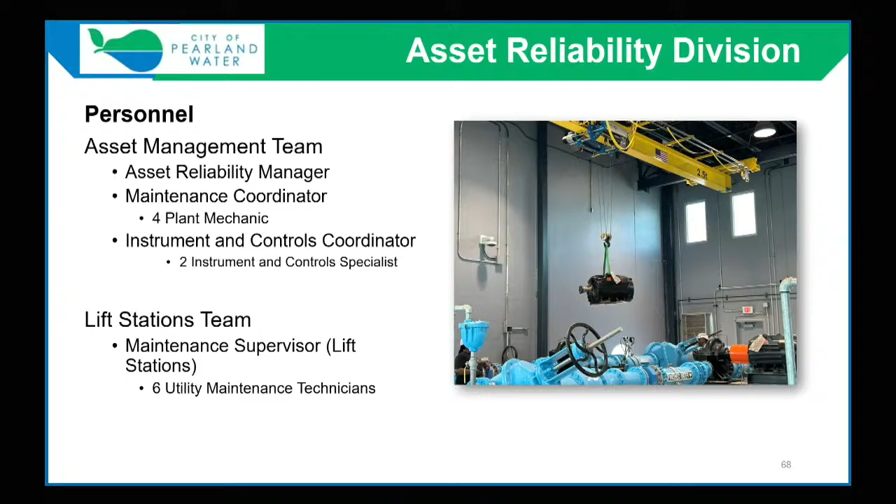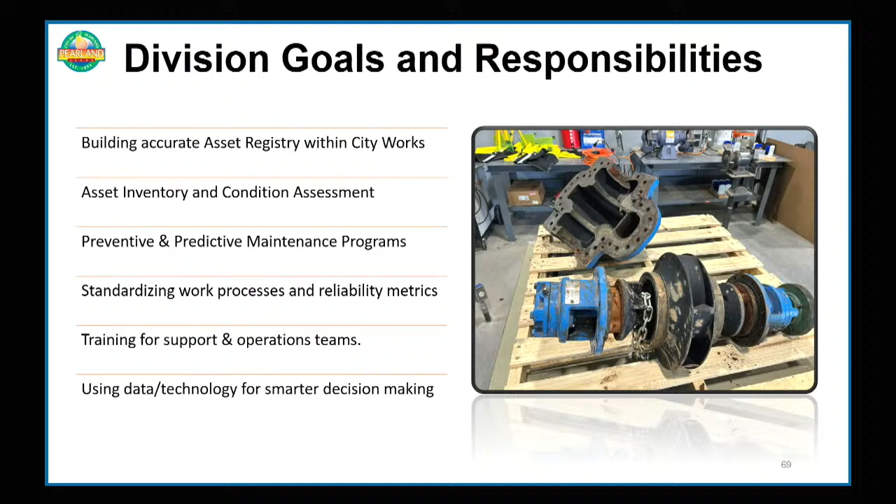Our goals are to build an accurate asset registry within CityWorks to ensure assets are being tracked and recorded properly, to conduct asset inventory and condition assessments for all assets being monitored, establish preventative and predictive maintenance programs, and track them within CityWorks, standardizing work processes and reliability metrics so there are no deviations from the high standards we expect, provide training for support and operation teams, use data and technology for smarter decision-making in future CIP projects, and use information from condition assessment reports to forecast future issues and prevent them from becoming larger issues.

Our priorities and impact for fiscal year 26 are to reduce unplanned downtime due to asset failure and to be able to predict lifespan. Also anticipating cost savings through efficient maintenance plans, ensuring the lifespan of assets is increased and not having to be replaced as often. By completing baseline assessments of all critical assets, we will be able to identify preventive maintenance schedules and prioritize the highest needed systems.

As we improve the information we enter into CityWorks, we will be able to track performance, ensuring accurate assessment of future CIP projects.

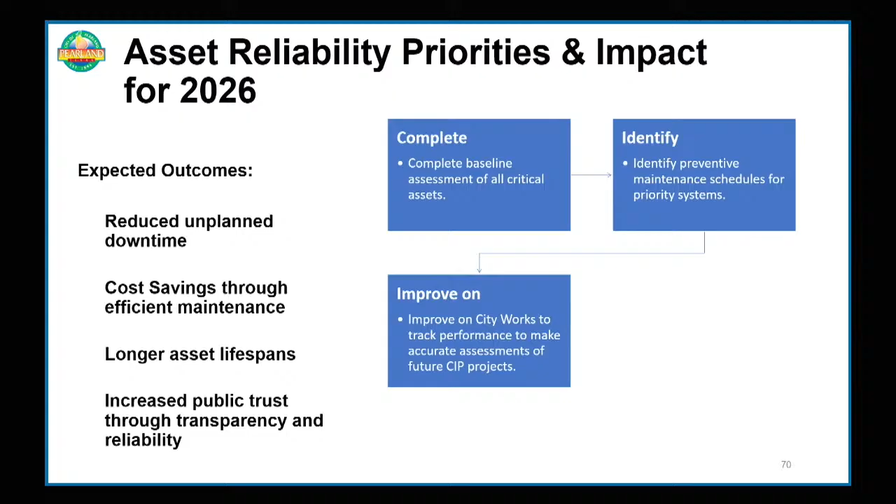Our lift station team exemplifies the always at work philosophy of wastewater operations. Managing 71 wastewater and 7 stormwater lift stations requires monitoring these wells 24/7 to ensure uninterrupted transport to treatment facilities, performing predictive and preventive maintenance to avoid costly breakdowns and emergency repairs, using programs such as SCADA to better allocate our resources.

The team's efforts are vital to keeping wastewater systems running smoothly day and night. Their proactive approach reduces service disruptions, protects public health, and supports the long-term sustainability of Pearland's wastewater infrastructure. Wastewater operations is not just about maintaining the status quo, it's about anticipating the future, solving problems before they arise, and ensuring that Pearland's residents and businesses are always served by a dependable system.

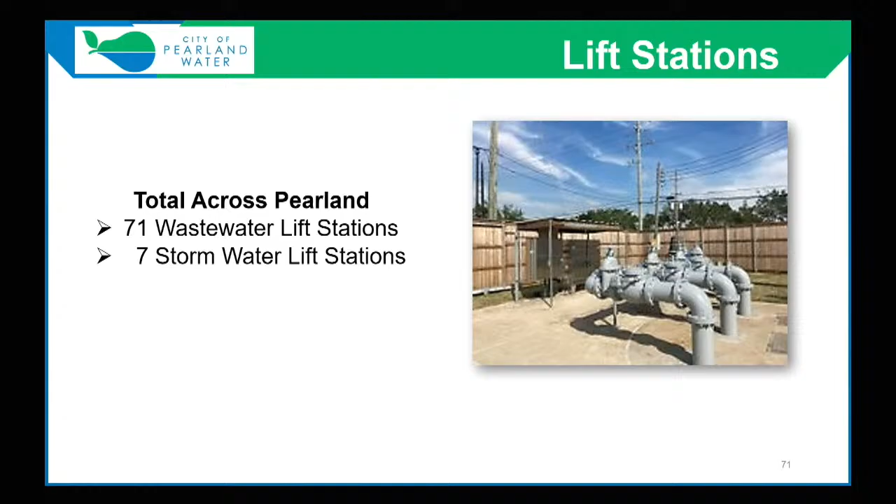Thank you for recognizing our ongoing dedication of our teams and the crucial role that they play in our city's success. This concludes the wastewater O&M portion of the presentation. At this time, I'd like to transfer the presentation back to City Manager Trent Epperson. Back to you, Mayor and Council.

All right, we'll open it up for questions and comments from council. Anybody have anything? Mr. Koza?

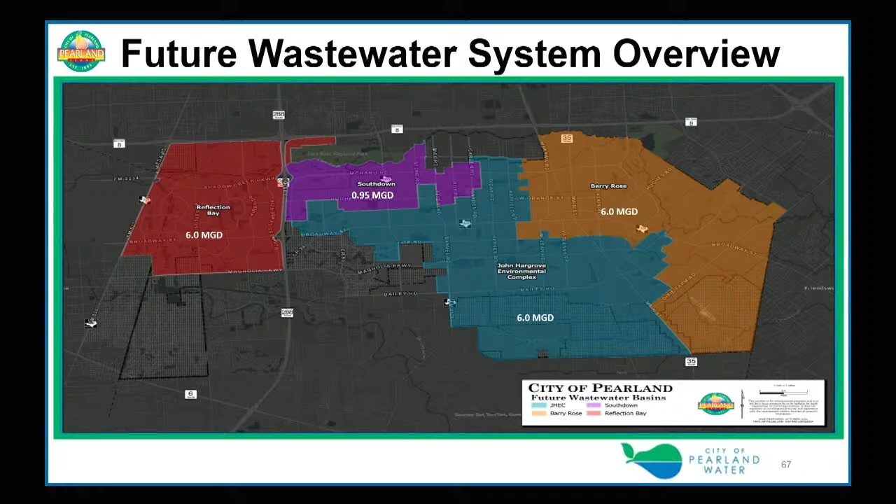It seems like it's not very efficient to have one plant of that size. I think it's in the CIP out in the future years. I can't remember how far out we moved it. Yeah, I think we moved it a little bit far out. We just finished the preliminary engineering report that came up with recommendations on the route for the force main.

I think that was one of the ones we were looking at from a timing standpoint and how to help manage the water and sewer rates as to when we do it. But it is on the plan to ultimately do that. And that's going to Reflection Bay? Yes, sir, correct. All right.

And then at some point we'll need to update this for the new force main at Smith Ranch, because that flows over to Reflection Bay. With the PID project? Yeah.

All right, any other questions, comments? All right, staff have any wrap-up? Any wrap up? No. Appreciate the time, Mayor and Council.

Great job by the team. It's great to be able to sit down and kind of walk through these projects and what's coming up and where we are periodically. So as part of the ongoing process, because we'll be rolling into our strategic planning in early 2026, which leads to early budget input, and all these things impact and are part of that process.

So thank you. Yeah, I just want to, David, thank you to you and your team, everybody in the participation today. You got a great leadership group there, so I appreciate all the input and presentations for the day.